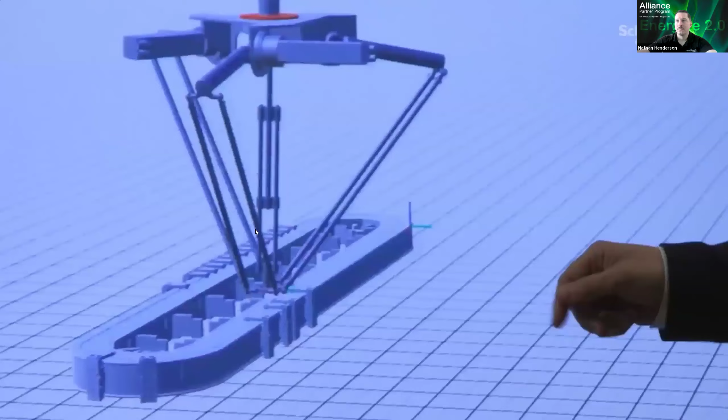Perfect. Lisa, appreciate the opportunity to be here today. I'm going to migrate over to the PowerPoint presentation that I've got, and let's begin. While I'm doing that, I'll introduce myself. My name is Nathan Henderson. Been working at Schneider for about 3 years now.

Part of the EcoStruxure Automation Expert team, part of our software-defined automation offer since the beginning, and really here to help demystify a lot of the message that we've been delivering and really to identify the nuts and bolts of how this is being deployed.

My role within Schneider is to support system integrators. I'll put my contact information at the end, but please don't hesitate to reach out. My sole role is to empower integrators to have the same content and enablement that we internally have at Schneider, to share use cases, value propositions, architectures, to really do a lot of the back-end engineering that is required with a lot of these new offerings.

Let me share the screen. It looks like I am.

So today we're going to be talking about Automation Expert, and this is fundamentally a software-defined automation conversation. I'm really going to try and highlight what software-defined automation is and parallel that to what Schneider is doing as a next step for open software-defined automation. So to begin, we really have to look at the struggles of the past, what we're coming from and what we're trying to fix.

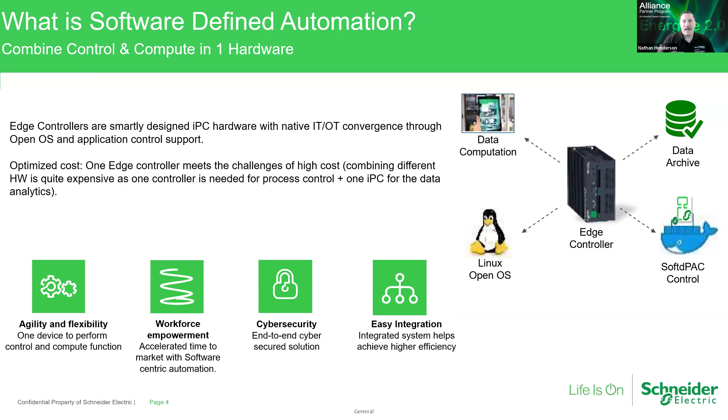And then we make it so the end user has the ability to pick the best in class programming development for the software and independently then look at the marketplace and say, this is the best in class hardware for my specific needs. This makes the most sense for me. And of course, there's a broad variety of ways that we deploy things, but really it is the freedom to, again, abstract the hardware from the software.

I won't go into too much detail on 61499 versus 61131. I will say that software-defined automation is event-driven. It hinges off of the 61499 standard. The 61499 standard is really just an elaboration of 61131. 61131 is how do you deal with one controller. 61499 is how do a series of controllers talk.

But since this is an IT/OT convergent tool, this is a standard that came out about 8 years after 61131 as a way to address IT/OT convergence. This is something that is still being realized in the market. But the advantages of 61499 versus 61131, event-driven versus cyclical, is a greatly reduced load on the processor itself. This opens up opportunities that a PLC would struggle with because it's usually running at full capacity. But do know that this is event-driven and interoperates seamlessly with IT systems because this is how IT systems operate.

Again, the advantages of using an IPC. As I've been down this path, I keep asking, why would you consider software-defined automation versus a classic PLC system? And the more that I'm in this role, the more I realize that it's not that question. It's why would you consider using a classic PLC when you have revolutionary technology at your fingertips that allows increased cybersecurity, increased computational ability, increased network flexibility? I think the conversation really becomes, why would you consider using PLC based 61131 logic when better and more robust systems exist?

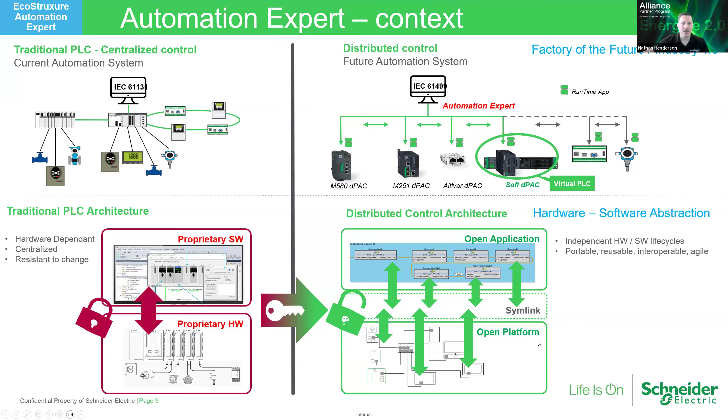Let's make that automation code an asset such that as an end user, we can now take our code and be flexible to pick best-in-class hardware. New product comes out, great. Well, we can jump on that without having to wait 5 years for end of life. That's really the freedom that this allows.

And when writing an application, it's a little counterintuitive to 61131 because it is the reverse of what we're used to as a system integrator. You design using library objects, pre-built validated blocks, or you design your own if you have unique needs. You create your entire application within the build time.

And again, I've discussed this. Schneider is leading the market, but with universal automation, I'll talk about this. There is a world where in 5 or 10 years, an end user can choose between their design environment and their hardware choice because the software level is completely abstracted. Now, universal automation org right here, this is the enabler. And I think this is the step that Schneider took that is an industry first, that has never been done in the world before.

Universalautomation.org is a third-party nonprofit organization. They manage this common runtime. This is something that has been founded off of a decade of work and collaboration, but to distill it down, Schneider has developed an engineering tool and a runtime environment. In 2021, Schneider gave away the runtime portion to be owned and managed by universalautomation.org. This is now a member-driven developmental path.

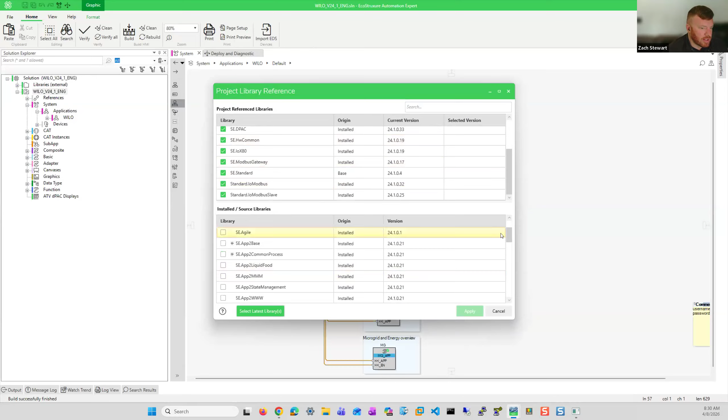So another thing that's really nice is we have a really extensive set of libraries. So just to give an example of some of them here, these are the ones I have referenced, but we've got quite a bit here that aren't referenced. So when it comes to building an application, 90% of the tools that you need to build the application are already contained in the build time. And we actually do a really good job, in my opinion, of documenting how those things work, right?

So I'm going to pull up a web browser that has, this is our general help document, and I'll navigate to some of the library guides. So I'll go here to the application library, and I will go to water, wastewater.

You can also do this from the build time. It's just a little faster here. So maybe I go to queue management. Here we go. I can go to equipment. I can go to aeration, and it'll show me these different blocks that we have for aeration in a water wastewater facility. And some of these will also give you an example of what other blocks you need to build the system, how to connect them.

And then if you wanted to go even lower, you can get an interface to the block, what OPC UA variables are available, that sort of thing. So if you're kind of just fumbling your way through the application, you're able to get an idea of how the tools you have at your disposal work.

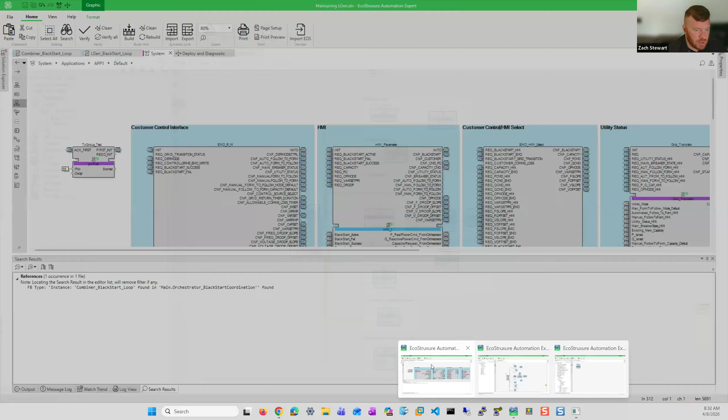If we look over to the Solution Explorer, so I showed how we can include libraries into a project. We have 3 main building blocks here. So we have something called CATs, which are composite automation types. We have something called composite blocks, and we have something called basic blocks. So I'm going to switch applications here.

The CAT is essentially a function block that can contain other function blocks nested inside of it, but it also has symbols and faceplates. So what that means is I might have something like a motor VS, which is a variable speed motor. That could be a CAT that would have the control logic contained in it. But when I go to make screens for my HMI, I would also have visual information associated with that CAT.

We have a thing called composites, which are essentially just headless CATs. So no symbols, no faceplates, just the control logic. They're blocks that can contain other blocks nested inside of them. Then we have this thing called basic function block. So basic function block is a low-level block. It contains a state diagram and structured text. So let me pull up an example of what that would look like.

Here's a really complicated example. This is for a generator management application we wrote for another customer, and you can see this startup sequence is fairly complicated and involved. So there's really simple examples, there's complicated examples. All the code here is in structured text. And we also have a debugger attached with this, right?

So if I wanted to validate the functionality of the block, just this singular block, I can run this debugger here. And I could simulate the inputs, send the events, and then just verify that the outputs I'm seeing are what I expect.

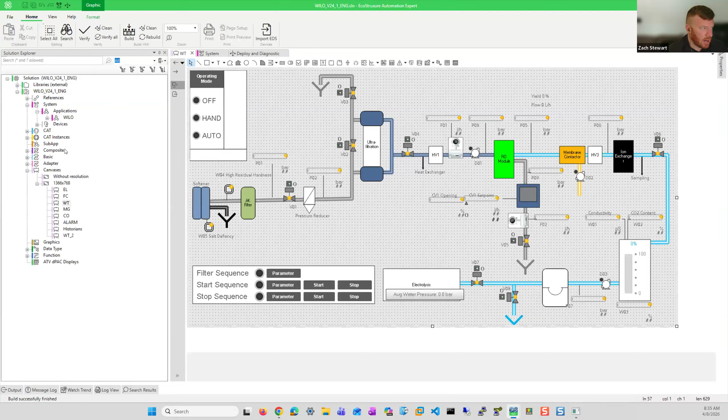So the neat thing is, as an integrator, if you build up your library and you've put in all the work to test and validate your objects, when it comes to scaling up or building different sizes of systems, it becomes pretty easy. So this water treatment facility, I can just drag this over. Now I have 2 water treatment facilities. So I'm going to do a little hand waving on some of the connections here. And then I can point it to a controller that's going to be controlling it, right?

So I can say, hey, this is going to go to a 580 controller, a 251. Those are Schneider branded PLCs, but there's nothing stopping me from pointing this to a server in some IT room that has our virtualized control running on it.

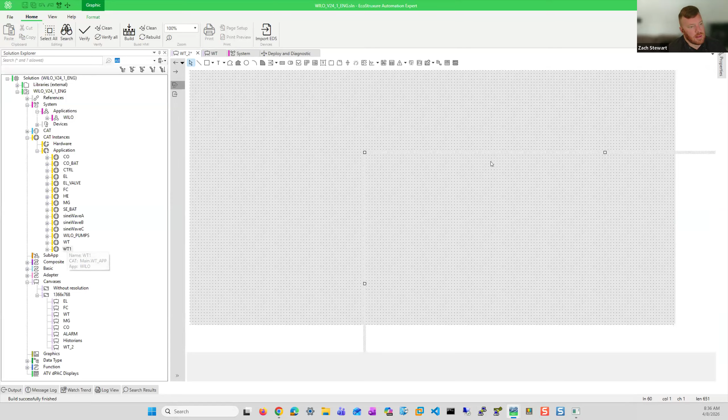The same way that I did that in the control logic would be the same way that I do it in the application logic. So I drag and drop it onto the canvas, I copy it, but also on the HMI screen, I can take this water treatment object and I can drag this to the canvas. So now I have 2 water treatment sections in my plant, and the logic and the screens for both were really just drag and drop. If I start this HMI up, remove this here.

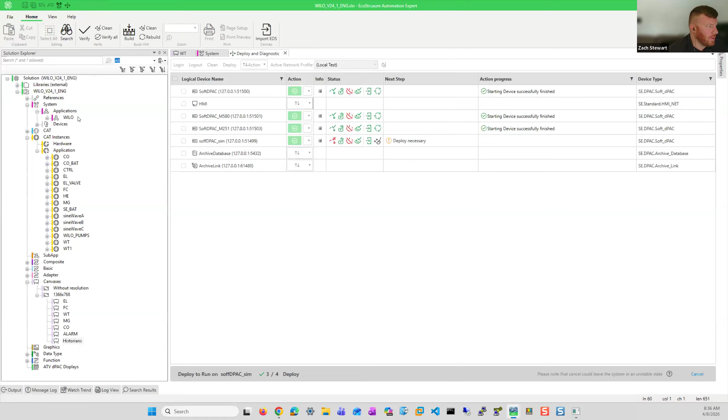I didn't like that I added something while I instantiated it. Okay, so I'll move to a different section. So that's how the HMI screens are developed. Again, we have a built-in HMI. The really nice thing about it, we have an OPC UA server that could serve third-party SCADA systems. Because we own AVEVA, we have some really nice synergies with System Platform. So in the same way here that I built this local HMI and had those symbols and faceplates ready to go, I would have a similar experience with System Platform.

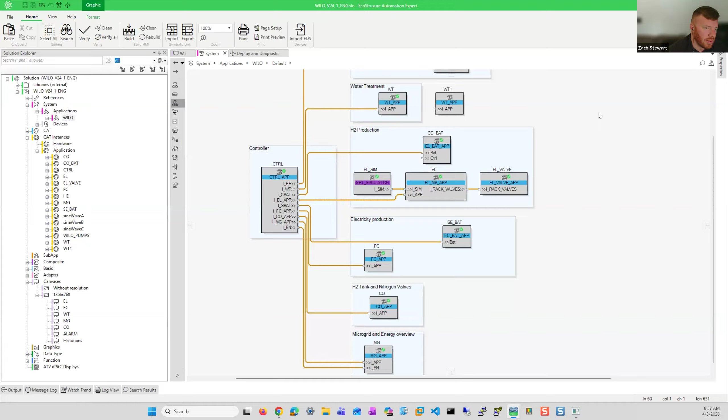When it comes down to hardware, I'm going to switch to another application again. Not only can I take my application logic and templatize it in a function block, but I can also take the interface that I have with external devices, maybe over Modbus or Ethernet IP, and I can also templatize those. So we have application CATs and we have something called a hardware CAT. So that's what you'll see here. So here I have 4 generators. Each of these generators has an interface with different electrical set points of real, reactive, apparent power, scaling factors, all those sorts of things. Those are going to be identical for every generator.

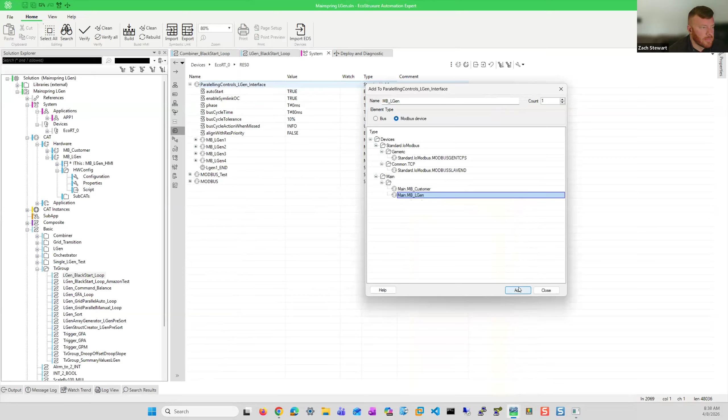So if I wanted to add a 5th generator, I'll click add here. You'll see I have a pop-up window. Can't remember which one it is. I think it's this one. It'll tell me I'll have to redeploy if I'm online, if I make a modification. So now you can see I have another interface here. This would be LGen5. So this would be the 5th generator.

So not only can I take the hardware interface and duplicate it, but I can also take what we call our symbolic links. Other people might call them global tags. But how we point data points within the application to the hardware is through symbolic links. So this configuration I can import and export. But I can do the same thing with symbolic links here, right? So you can see I have this export button.

Now, if I go to desktop, it'll take a moment here. But you can see now I have all my symbolic links for everything that's mapped to this resource, right? So you can see how I have them for different groupings of generators. Where this becomes really nice is you make these connections once, and then, through Excel or Python scripting, it becomes really easy to change these connections as you scale up. So you're not manually pointing tags to each other. So that's how we connect to external hardware.

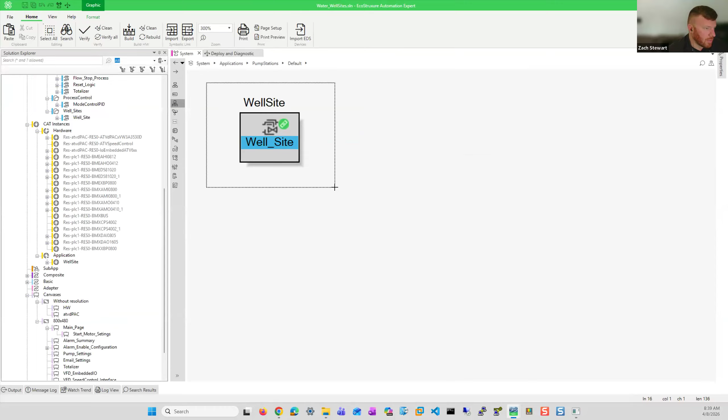Another thing that we can do is based off the hardware that we're mapped to. This is now a third application I'm showing you. This is a well site application that we built for another customer. This is actually mapped to what we call an ATV DPAC. So it's a compute module that you can put in Altivar drives. So when this becomes mapped to an ATV DPAC, what I can do is I can make another canvas again. I'll go to embedded IO. And I can take the embedded IO from the drive that I'm connected to, and I can just drag it out here, right? So I didn't need to use C# and make any of these symbols or anything. This is just all built into the build time application.

And this is some of the stuff that you just kind of get for free that you don't have to develop on your own, right? So when I map this to an ATV DPAC, all of these DIs and everything that's connected to it in the hardware configuration, I can get a visual representation of it here on a local HMI or on an HMI that we deploy in the field. And you're also able to see those values and force and test.

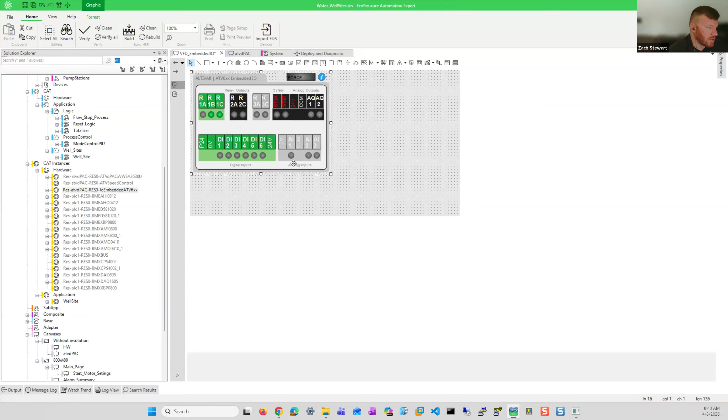See a couple other things. So we have data types, we have functions. So for the more programmer savvy types, we can make things really interesting. We also have a thing called adapters. So what that means is we can take multiple data points and we can contain them in one adapter, right? So this could be 20, 30 different variables. Maybe you don't need to spend the time connecting 20, 30 variables externally. You could just put them in an adapter type. And this is what we call single line engineering, and that's where that comes from, right? So it really cleans things up as you're building applications and makes them a lot more maintainable.

Earlier, I mentioned a virtual controller. So the way that we deploy to hardware is we either have UAO compliant hardware that would be your traditional PLC form factor. Those are firmware driven devices and you just deploy to those devices. We also have industrial PCs, right? So I could take this application, I could deploy it to any vendor's industrial PC as long as it's a Debian based operating system, Ubuntu or Windows, and I'm not going to check who the vendor is, right? And the application isn't going to check either. If the runtime's present there, that's all that really matters. So let me close some of these out.

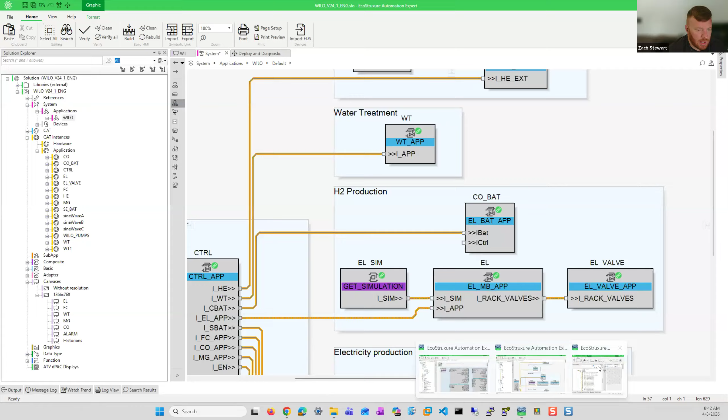And I'll walk through how you deploy an application to the virtual controller that's built into the build time device, and then I'll walk through how to do it with physical hardware. So here we have a well site. It's pointed to this ATV DPAC. I can verify that here.

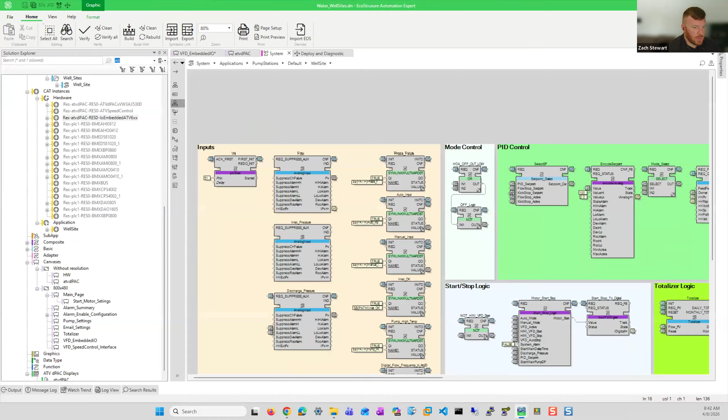Let's say that I've designed this, right, and I've built everything up. This is what it looks like under the hood. Got PID control, inputs, totalizers, start, stop. Now I want to validate the logic. So I come over to this deploy window, and up here we have this active network profile. So local test means use the virtual controller that's contained on this computer. Default means use real hardware.

So I'm going to use local test. I'm going to press this green button. When I press this button, there's going to be a bunch of steps that are contained. Here's what's happening on the other window. This is our virtualized runtime. I'm going to log into this device. We don't need to check any of these boxes because we're not on real hardware. So now I'm going to deploy. It'll take a couple seconds. This program is relatively small, so it shouldn't take too long.

For the non-colorblind people in the room, there's some nice red-green status indicators here that'll become helpful as you deploy to more devices down the road. But unfortunately for me, I struggle to see them. So,

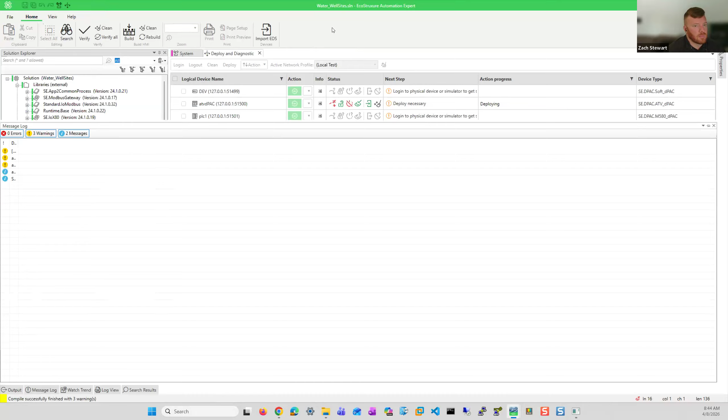okay, you can see here we're on step 3 out of 4. We're almost done running, and then I'll show you how you can kind of watch values in the system. All right, in a second now. Okay, there we go. So we've now deployed to this virtual controller. This is what it looks like under the hood.

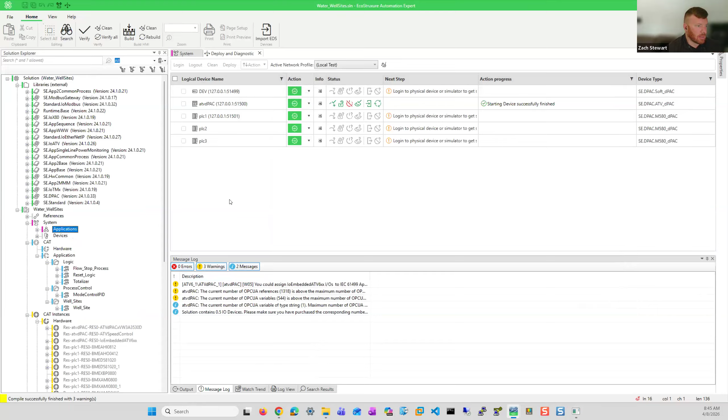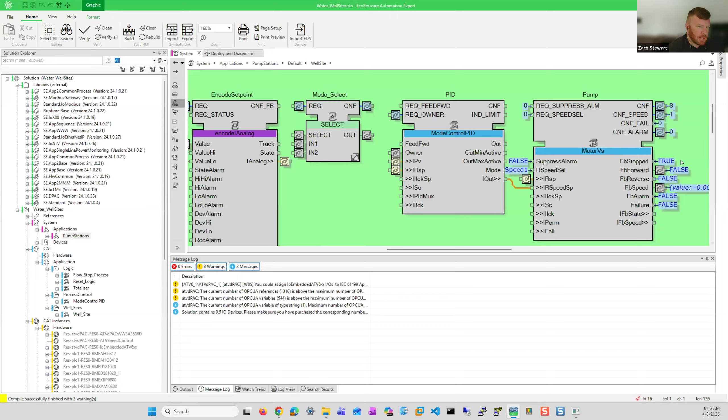Now what I can do is I can come over to this application, can come over to my pump stations, and now you can see I can add watches to blocks. So this will be a silly example, but I've got this variable speed motor here. It's not running. Maybe I expect it to be running, but it's not. You can see that the stopped here says true. So I can trace the signal back. I can look at what the set point is. The set point's 80, so it's got something there, but it's still not running. There's no alarm, so I know it hasn't faulted.

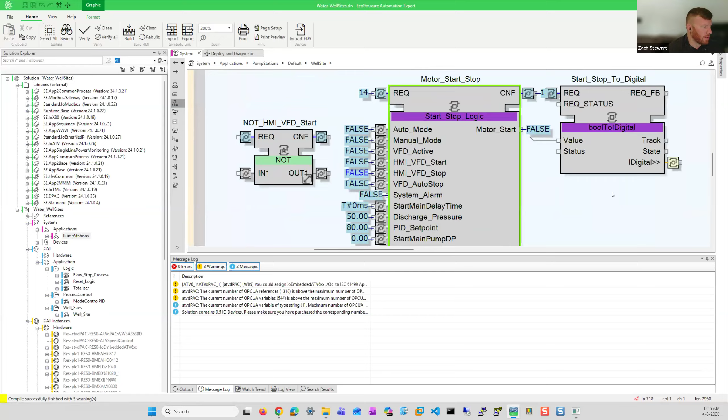I can come over here to the start stop logic. Oops. And then you can see I've got this HOA switch that's just in the off position, so that the start signal is false. So kind of a silly example, but just wanted to paint the picture of how I can build an application and test it without ever needing to purchase physical hardware to do so, right? I can do it just from my laptop.

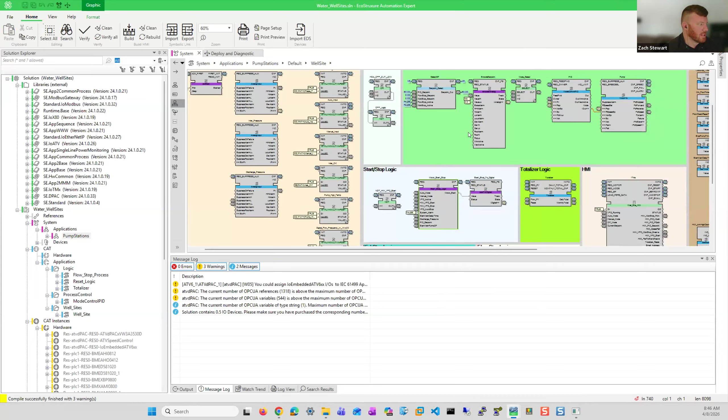I'll also say that what's nice about this, if we go back to COVID times, I remember there were lead times of a year or two for certain pieces of hardware, right? With this software, you would technically be able to plug a laptop computer that you got from Best Buy into a switch and be up and running, right? It's not advisable. It's not a long-term solution, but it just kind of details the flexibility that we have here.

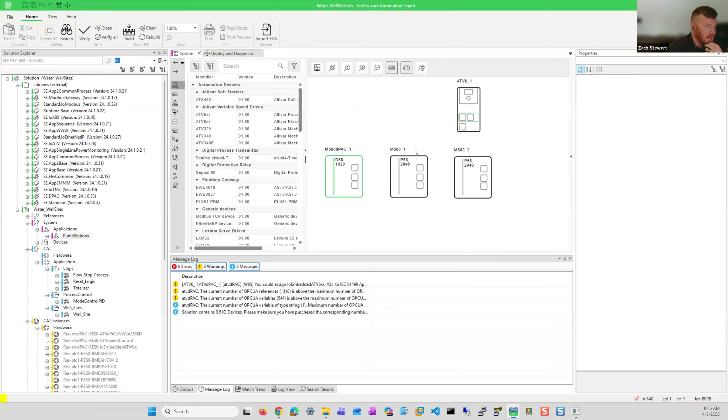And then the very last thing we'll mention, I know we're probably getting close on time, is what it looks like deploying to physical hardware. So earlier, Nathan had said something about cybersecurity. So I have these things called logical devices, which is what it was using when I was mapping function blocks to certain control devices. I have these things called physical devices. Logical devices are the glue between the physical device and the control application.

So if I were to start monitoring, there's no actual controllers on my home network, maybe a printer. But if I wanted to get to the point where I'm ready to deploy to devices, we're not going to let you do it without doing what we call configure security. So what that means is we're going to scan our local network. We're going to look for control devices. And then we're going to put the IP address in.

We're going to click configure security. It's going to ask you, is this device who you think it is and do you trust it? You're going to say yes. And once you do that, we now have a tightly coupled relationship with the application and the control device that it's associated to. So I won't be able to take a thumb drive and upload or download a program file. I won't be able to plug in another laptop and deploy to that control device without having the credentials that are tied to the project.

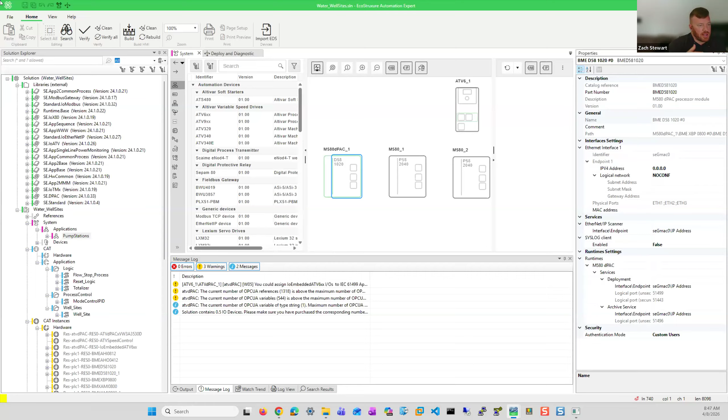So that's the foundation for the cybersecurity. And then from there, that's where we can start bringing in encrypted communication and things of that nature. So I think I will pause there and I'll see if we have any questions.

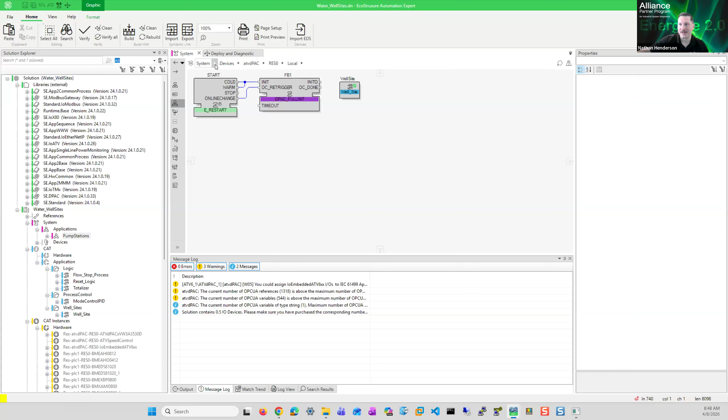Zach, I'm ready to pick back up and power through a couple use cases if you want before we jump into the questions. I know I didn't get nearly as far as I would have liked to have. Okay, yeah, no problem. I'm going to be quick, but I promise I'll leave time at the end for questions. I am going to go quickly, though, if that's all right with all on the call.

We left off at UAO. I'm just going to power through this. Again, this is not a small organization. This represents really a huge international organization of universities, of vendors, of industry leaders across every vertical.

This is, go ahead, Lisa, please. Would you like to be sharing your screen? I thought I had. I guess I will. I don't see it. Maybe others do. Is this better now? Yes, there you go.

Thank you. Perfect. So current UAO members, again, this is not a small list. Really, every major vertical is represented. Where we're seeing the most growth is end users, food and beverage with Nestle, Hyundai for automotive, BASF for chemicals. I could go on, but this is a pretty long list. And again, it's grown tenfold within the past 4 years, which is the kind of growth that I would expect out of something as disruptive as what we're discussing.

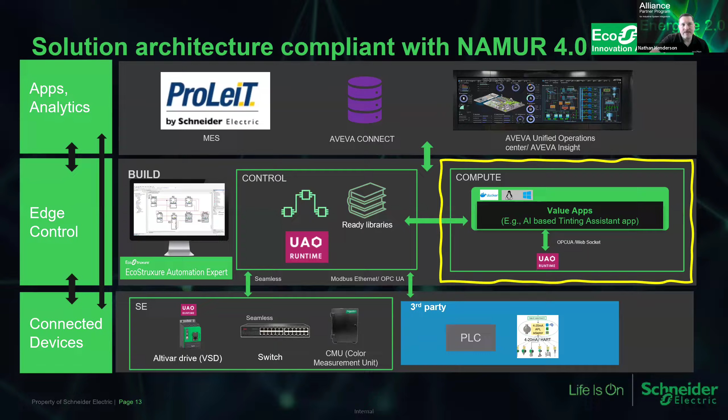It is truly an open architecture. So when I say this, Automation Expert is NAMUR 4.0 or NOA, NAMUR Open Architecture compliant. This is a technology that is based off of OPAF and OPAS standards, driven from, again, a truly open and interoperable system. And universal automation is the tool that allows us to do that.

The third-party organization, because we no longer own the source code, allows us to accomplish that, as well as any other manufacturing vendor. This really is saying this is what end users would require, and we're willing to present this solution to them because this is really what is in their best interests.

The software can run on a broad portfolio of hardware. Within Schneider, we solve our own interdependencies upon hardware. Classically, with 61131, there would be a different software suite for your drives, for your machine PLCs, for your flagship PLCs. What Automation Expert does, it is one runtime that runs across all of these devices.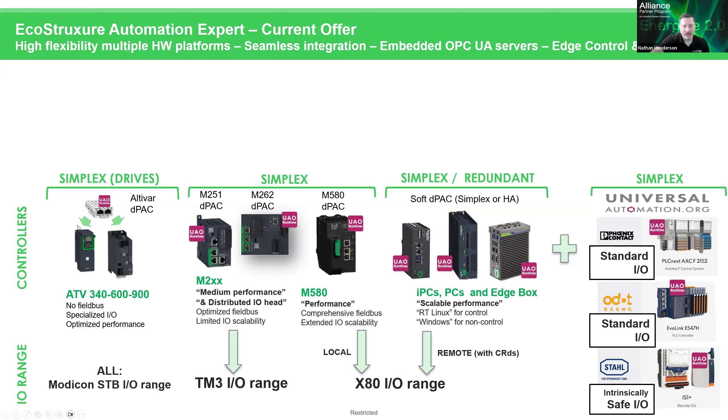And if you want to change from machine PLC to a more involved, again, high availability or flagship PLC, then there's no reconfiguration needed. It's one tool that works with all of this hardware, as well as any universalautomation.org hardware or any Windows or Linux-based device. But running on the drives, that's a really powerful use case and one that I really hope to dive into. Again, I'm rushing through things now, so bear with me.

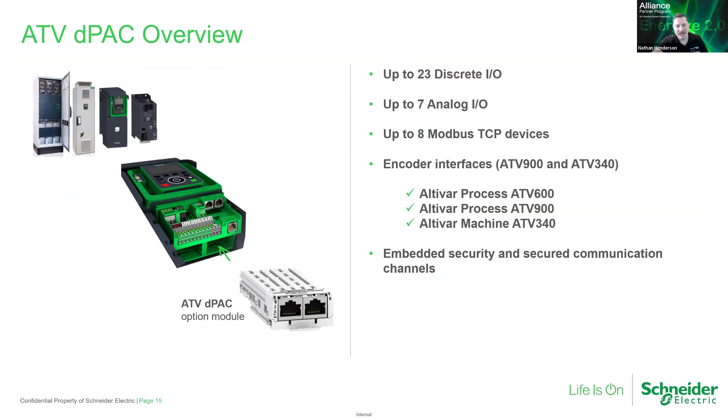But you can turn our VFDs into an effective PLC and HMI, and that is something I have been looking for and can't find anywhere else in the market. You can take our VFDs and turn them into a PLC and HMI. I'm going to repeat that again. We've been doing this. It's a very strong use case. There are a couple different ways that we can do this.

Again, we can take a single bank of drives and plug in this Altivar DPAC unit. I'll tell you, this guy is about $250. This slide is outdated, but this little plug-in $250 controller will take this VFD and allow it to effectively act as a PLC. It can execute control logic. It can expose process variables, alarms, interlocks, all of this.

It can expose to this local Altivar keypad. If you wanted, of course, you could connect an external HMI, but that's really up to you. I mean, this is what I see as remote monitoring, very distant, not very often serviced.

You can go the classic approach where we're going through a controller and, again, VFDs as a connected product, or again, future-proof, where we're doing industrial PC managing VFDs. This is where I would imagine predictive maintenance as an edge application would be applied. Again, really working as a connected product with those VFDs.

But we've seen a lot of OEMs, again, because they put out so many units per year, eliminate the need for a PLC and HMI. And this is a tremendous cost savings advantage.

The Altivar drives have a good amount of onboard I/O. You can extend that with another plug-in unit, or you can use a TM3 I/O drop or X80 I/O or Edge I/O drop to be managed by this drive. Again, this can handle up to 8 Modbus devices, so it can handle downstream drives, it can handle I/O drops, it can handle any other Modbus device, again, acting as a controller.

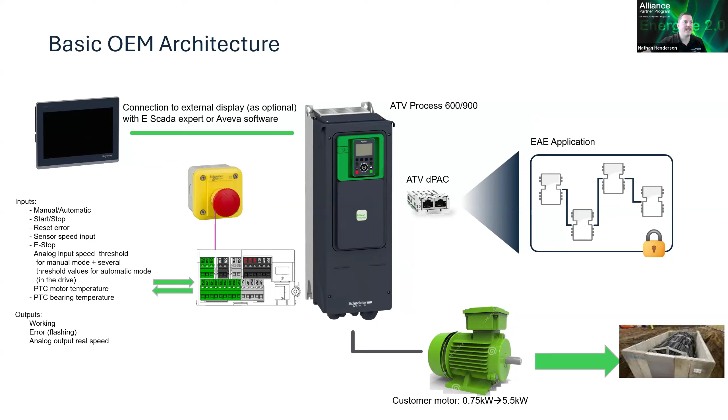Another process OEM machine. Again, here we're doing a lot of power monitoring. Again, a simple application revolves around one single pump with a lot of onboard analytics, but all of this containerized and executable through a VFD and a VFD alone.

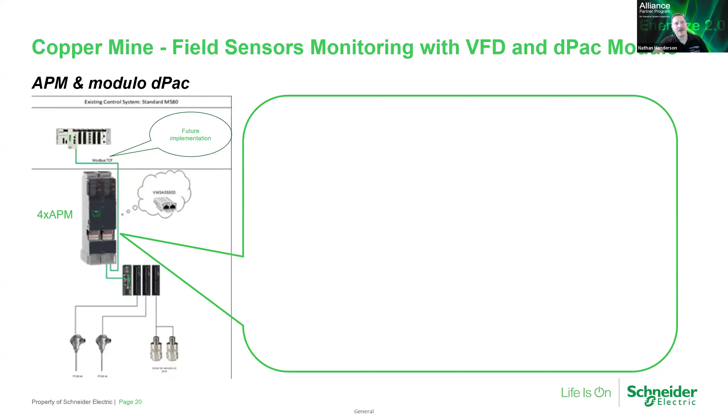This is another customer, a copper mine customer down in South America. They have a series of 80 tailing dams. Again, you don't normally go out there as maintenance personnel unless something is broken. They were at the point where they needed to modernize their old drives. We came in, we told them what we were doing, and what they were able to do is to install Automation Expert within the drives itself.

Again, this is not a location that is typically serviced. And because of that, we didn't need a PLC or a full-scale HMI with graphics. We just wanted contextualized information. So what they did is they linked all of their sites, again, using Automation Expert, but they used the drive, took the onboard analog I/Os, and added temperature sensors and vibration sensors to the motor to give them asset monitoring.

Again, not predictive maintenance, no advanced calculations, but this is asset monitoring on the resources to give them more information on some of these remote resources to determine, well, this is falling out of spec. This also allows you to create interlocks, again, based on device condition.

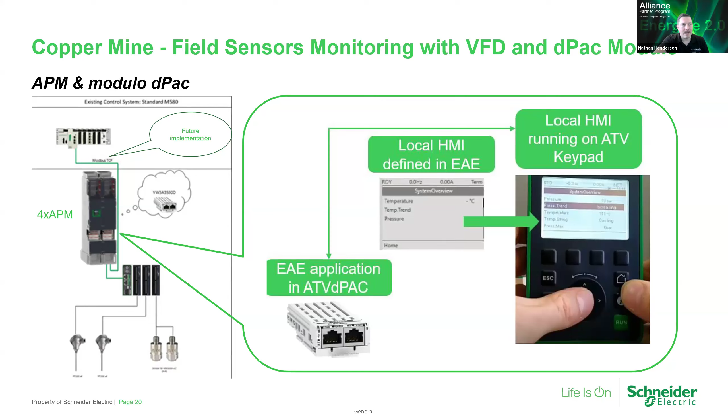We're looking at vibration and temperature here, some of these built in, some of them you want to add external sensors to, but this allows you to, again, at the device level, at the drive level, add some of this complex logic without the need for a PLC or an IPC. Huge cost savings.

Another example, this is a glass factory. This has to run continuously for 10 plus years. This is one of the most critical high availability instances that I can think of, but they're running entirely off of VFDs. Now, this does go to a DCS and they have redundant control, but they're using, again, duplicated systems. Of course, controlling a primary and a secondary motor.

You cannot stop, or the whole plant will seize up and they'll have to rebuild everything. But the drives are bulletproof enough and dependable enough that they act as the PLC and HMI. Again, with the ability to fail over to a secondary drive if there's a failure determined here or at a connected device. All of this programmable to the VFD itself.

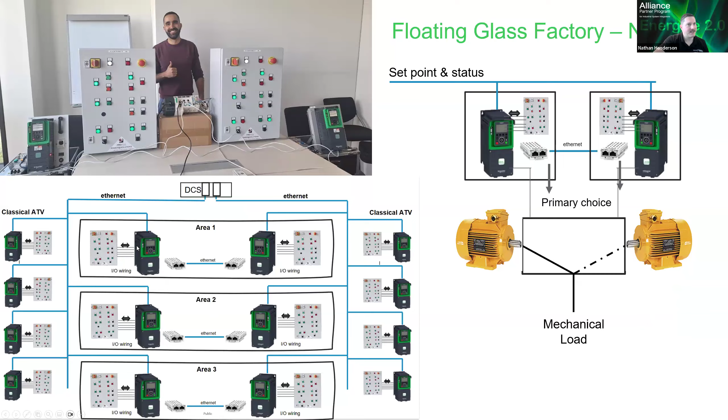I'm going to skip over this one, although it's very interesting. Please don't hesitate to reach out if you'd like to hear more about this.

It's also a wonderful tool for edge applications. You can deploy across, as an OEM, multiple instances, online updates, programmatic changes, cybersecurity pushes without affecting performance, without having to send an operator out to manually plug in a USB and to connect to each individual PLC. There are many different ways we can do this. We have some partners that provide services like this.

Again, this is a software stack, a microservice type of solution. Barbara accomplishes this out of the box, as well as some open source tools like Kubernetes. Typically, the software stack to implement this is very technically difficult to set up, but it's possible. It's possible within this platform, and end users are doing this to, again, push updates to their many remote sites, or as an OEM to push updates to your many different skids that are deployed, again, without having to physically fly out there or having to shut down production.

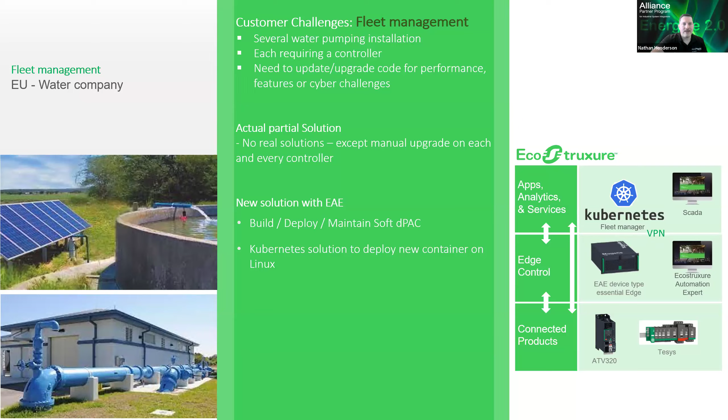Machine vision. And again, I say machine vision, but I really want to generalize that to all kinds of additional sensors, whether it's vibration sensors, noise sensors, thermal sensors, infrared sensors. All of these are very easily interoperable with Automation Expert. A couple different paths. Of course, the classic path would be your PLC with an HMI. You're getting enterprise data from your machine AI system, and it's sending start-stop commands to your PLC.

But we can take things a step further. And this is, I think, the most simplified and really demonstrated value of EAE: we can integrate with the Cognex camera, again, with its own embedded AI that can then send commands to the PLC as far as contextualized data. All of this done, again, at the level 2, level 3 layer, none of this enterprise, but since this is a containerized AI, it interacts with the IPC and can make real-time decisions.

If there's a quality control system where a defect is realized, no longer do you need manual operator interference. Now we can have contingency plans in place. If production falls out of quality, do we shut down production? Do we look at certain assets? This allows us to really automate all of those workloads.

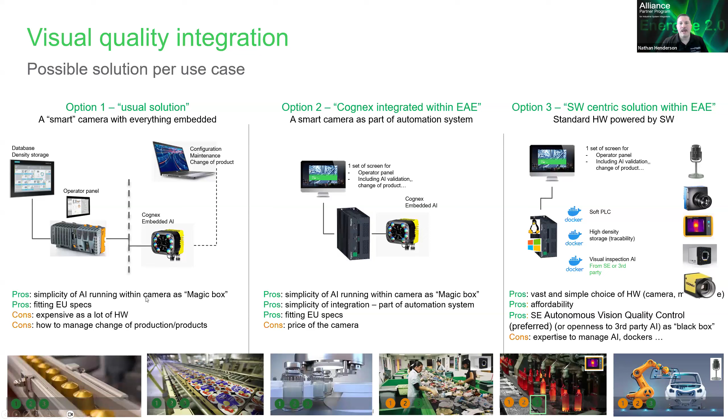So again, a couple different applications, machine vision, looking at the quality control. Here we took existing quality control and we accentuated that. We added a cobot to introduce a sorting line where bad quality items were in real time sorted out from good quality items, as opposed to taking that QC data and then reacting to batches after the fact. Saved a ton of money there.

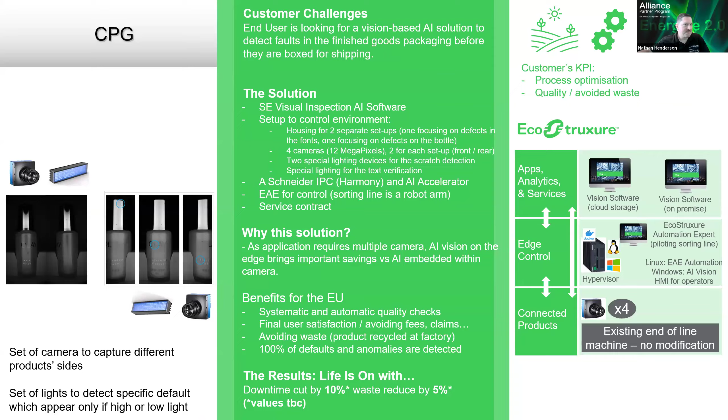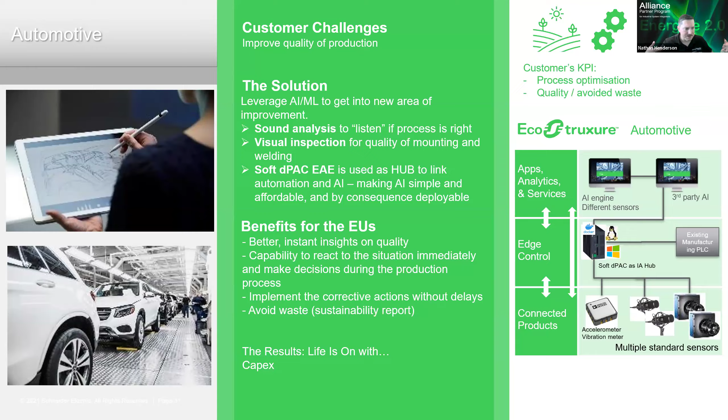If there's defects, then it's not quality control going to the operator and saying, hey, this batch needs to be thrown out. It is a real-time reaction to a defect anomaly detection. And this is all possible because these devices tie into the control system. You can set up interlocks, alarms, permissives, contingency plans.

I'm looking at the time and I'm going to have to cut this short. I apologize. I have more that I wanted to cover, but again, this was meant to just get the juices flowing and to really highlight the interesting ways in which we're seeing this used. I didn't touch on any of the classic replacements, and there's no need to because this is just a different way of doing things. But these are the things that the traditional systems that we're used to dealing with would struggle to do as a turnkey single platform.